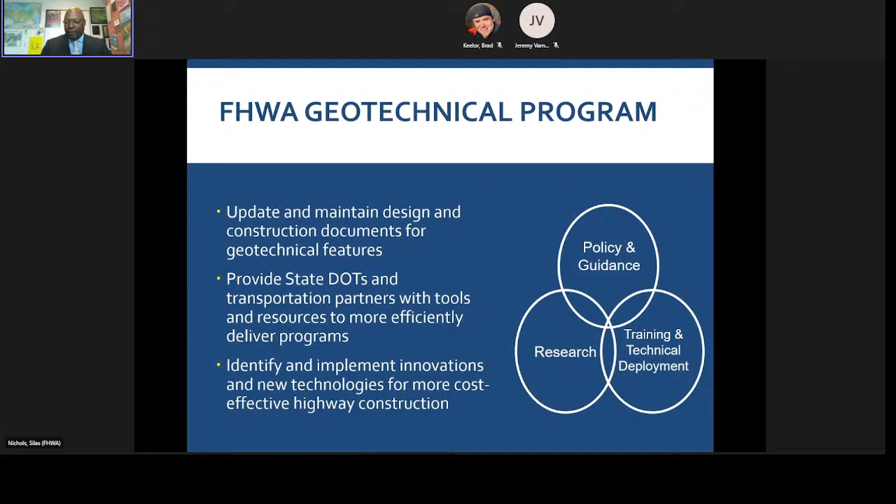Here, what we do is update, maintain, design and construction documents for geotechnical features. We provide tools and resources for more efficient delivery of programs at the state departments of transportation, and we look for ways to identify and implement innovations and new technologies for more cost-effective highway construction solutions.

At the moment, the technical focus areas we're dealing with are outlined here. There are 5 we're pouring funding into primarily: innovations in geotechnical design and construction methods, advanced site characterization, geotechnical asset and performance management, and then areas that are multidisciplinary but not necessarily primarily geotechnical—scour and pavement—areas where, because we are a Department of Transportation with bridges and roads, we feel it's really important for us to be involved.

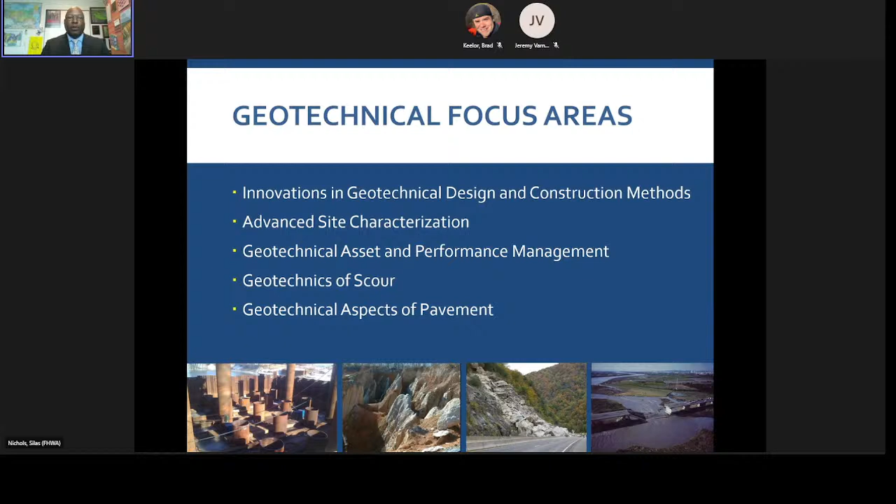But the one we're going to focus on today is the first one, the innovations in geotechnical design and construction methods. Our program objectives are pretty simple: we're trying to address a rapidly evolving geotechnical construction industry, through research and document or guidance development.

We're looking to address innovations in structure foundations, earth retention, and ground improvement that in the last 2 to 3 decades have been extraordinary and difficult for us to continue to write guidance around. Some of the areas we're actively working in are large diameter foundation elements, which is what I'm going to be talking about today.

Some of our barriers to increased use of shallow foundations in transportation applications, some of our contracting and procurement issues as we get more innovative contracting structures in place to deal with our more complex program and project delivery issues, some issues with acceptance criteria and equitability for geotechnical construction, and finally some of our ground modification issues and guidance. So really what I'm focused on today is just the first item, the large diameter foundation element issues.

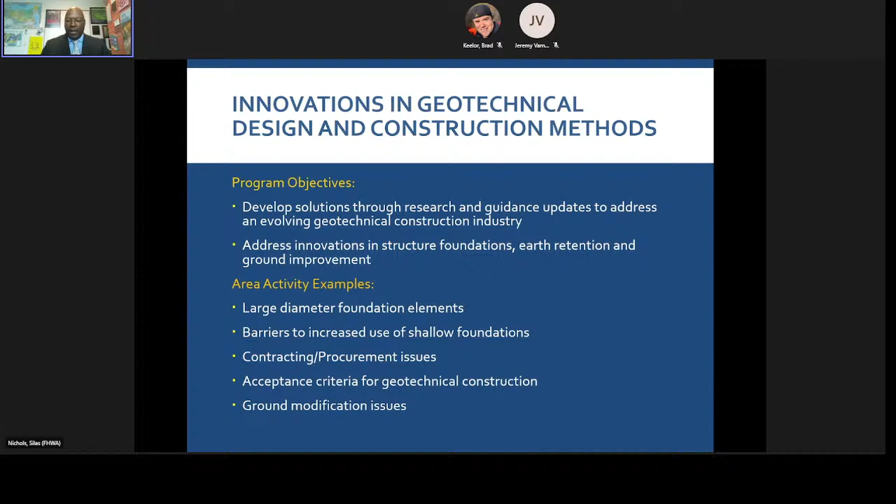I guess we could go back to the beginning and talk about what we do with a deep foundation element with respect to design. Traditionally, we've always thought about a nominal resistance or an ultimate resistance, however you want to determine it, as some combination of a side resistance and an end bearing. That's pretty standard. The thing that's not explicitly written on this slide but everybody's aware of is that you must move a foundation in order to mobilize any of that resistance.

And this really gets us to the root of the problem. As the elements get bigger in diameter and deeper, you have to move them much further in order to mobilize something we'd term a nominal resistance, and at some point that becomes impractical with respect to how we apply design.

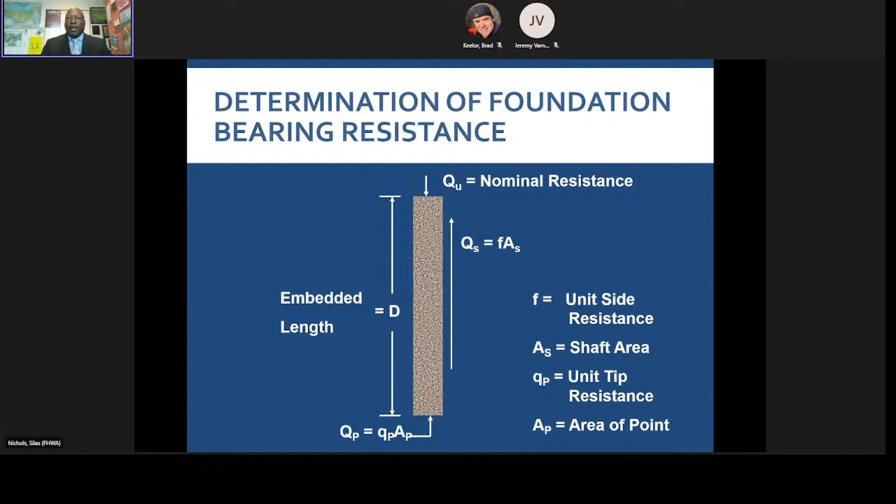This really is something that just comes out of the beginnings of the practice. We've developed all our design methodologies based on our analysis of load test databases, all kinds of different models including finite element and finite difference models, and our own experiences regionally around the country and around the world. But the issues we're starting to see are pretty extraordinary. The big picture issues for deep foundation elements are rooted in this idea that in probably the last 2 decades, the evolution in just how we construct foundations has been significant.

I'll get to why that might be the case here in just a second. But it's allowing us to have much greater load carrying capacity, much larger magnitudes of load. The demand per element is greatly increasing. Our materials and the demand on them is increasing. And as a result...

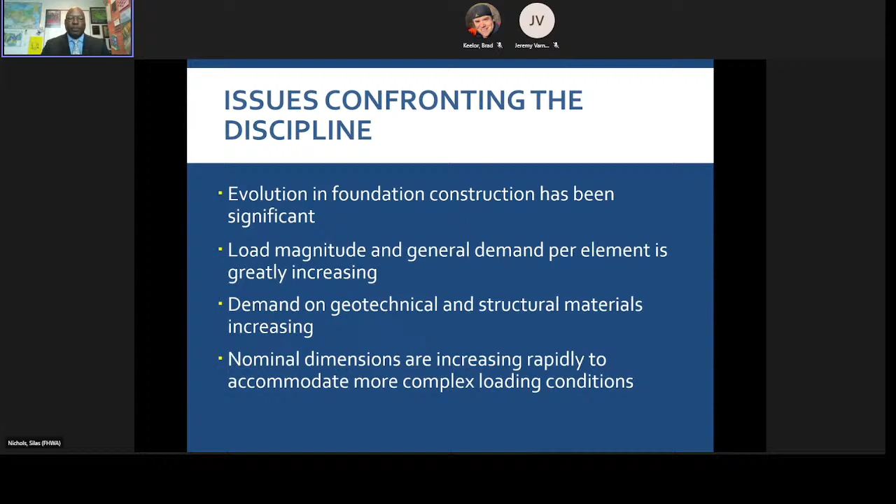The nominal dimensions of these elements are getting really big to accommodate really complex loading conditions. If you think about what has happened, speaking specifically to transportation, over the last few years, and really during our transition from working stress design to a limit states load and resistance factor design platform, some of the things that we're designing for now we really didn't pay much attention to in the past. Loading conditions like scour or vessel collision, seismic issues, kinematic loading conditions like lateral spread.

All of these are issues we really didn't design for in the past, but are now part of this more complex loading condition issue we have to deal with. So enter the emergence of large diameter foundation elements. This occurred in just a little over two decades, going from an average drilled shaft being no more than about 4 feet in diameter and no deeper than 100 feet, to things we're seeing today. There's an active project going on right now in the country with 12-foot diameter shafts proposed that are going to go down in excess of 220 feet. That is a different foundation design problem than the one we were used to seeing just 30 years ago.

It's not very different on the driven pile side. We were very used to very small diameter elements that we were driving into the ground, but now we're looking routinely at 6, 7, 8-foot diameter driven piles that we have to figure out how to not only control during construction, but determine what the load carrying capacity is going to be on them when we're done.

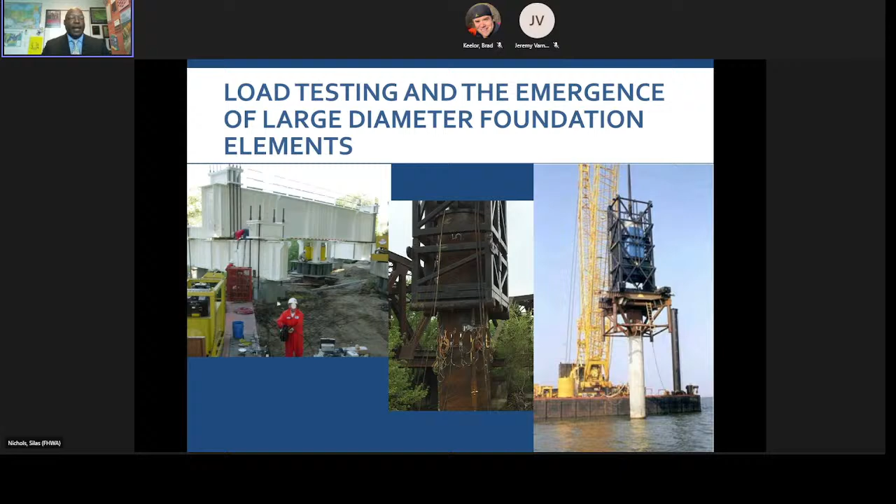The evolution here is partly due to advances in installation equipment. On the drilled shaft side, the development and implementation of rotators and oscillators. On the driven pile side, bigger and bigger and more capable hammers have allowed us the ability to build bigger elements. But really, this advance is mostly due to our advances in load testing, our ability to put bigger and bigger loads on things. This has allowed the industry to have much greater confidence in the design and construction of these elements, and hence our comfort with making them bigger and bigger.

To address some of this, the Federal Highway Administration and others have already begun a lot of work addressing this rapid evolution. I'm going to talk about a lot of this during this presentation, but documents we've finished in the last few years include our drilled shaft manual, GEC 10, our driven piles manual update, GEC 12, and we recently developed a document on lateral loading on deep foundations, GEC 9.

We've completed research on large diameter open-ended piles, that's open-ended piles of diameters 36 inches or greater. We've done some work on post-grouting of drilled shafts, and that has led into other work. The SHRP 2 program, the Strategic Highway Research Program, in its second incarnation, R19B project, was focused on calibration at the service limit state for load and resistance factor design.

We're looking at construction means and methods for large diameter foundation elements. NCHRP Project 24-51 is now in its beginning stages, active and working toward addressing that issue. There's also the optimization of load transfer in drilled shafts, which was follow-on work to the FHWA post-grouted work done for Caltrans.

Control of materials such as tremie concretes and high-strength steels - the Federal Highway Administration has done recently some work on tremie concrete, and we are actively getting ready to start more research on tremie concrete. Then finally, the acceptance requirements and procedures for large diameter foundation elements, or just foundation elements in general. We recently published GEC 15. It hasn't been formally announced yet, but it is available for download on the FHWA website. It is a document that looks at procedural information on how to properly go through everything you have to make an acceptance decision on a deep foundation element.

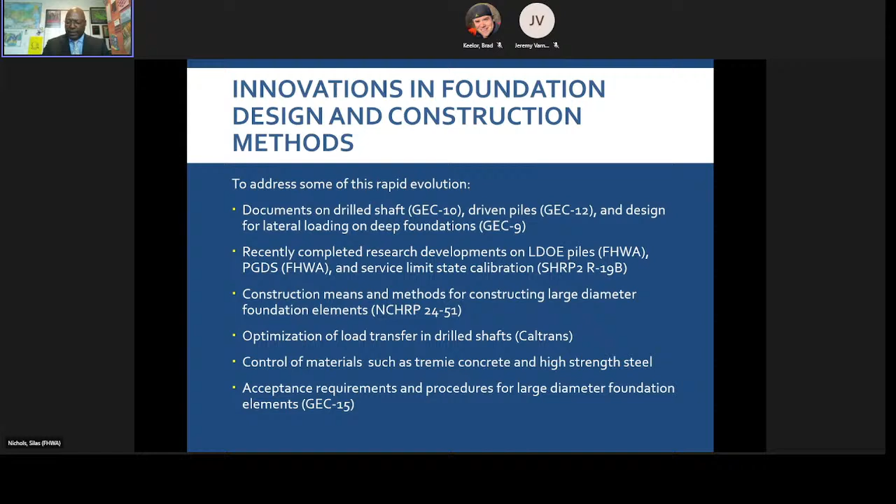I'm going to start with drilled shafts. Back in 2018, we published an update to our drilled shaft manual, GEC 10. I recognize it has not been easy to get your hands on because it hasn't been available for download. We're working on that now, and I expect within a few weeks we'll have it online and available for download.

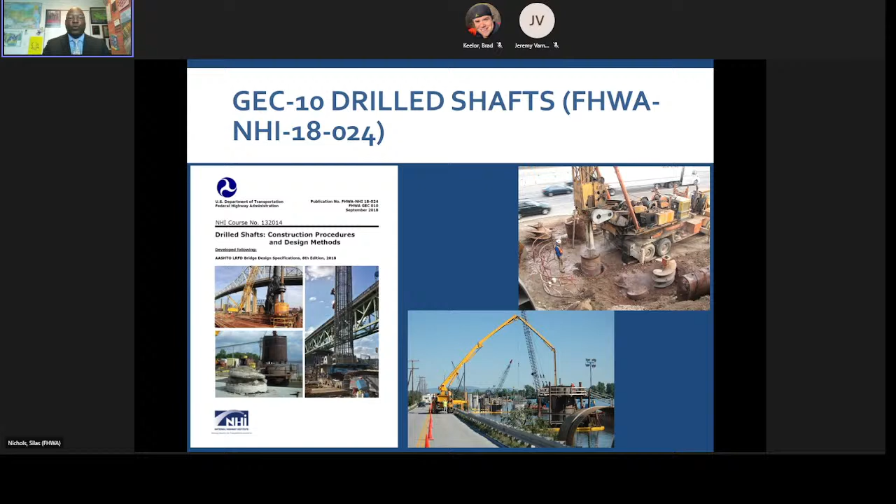The drill shaft manual was updated in 2018. It was a really short turnaround from the previous version because the evolution in this area has happened extremely rapidly and we haven't been able to capture everything we needed. As a result, we had to start a major update to this document five years after the previous version.

The things we were able to address included the shafts becoming much larger. Back in our 1999 version of this manual, it was designed with the idea that shafts were never going to be larger in diameter than about 4 feet, and wouldn't be deeper than about 100 feet. That's just not the case anymore. They're much deeper, we have new means and methods for installation, significantly longer concrete pours, which is its own headache, and much larger load carrying capacities.

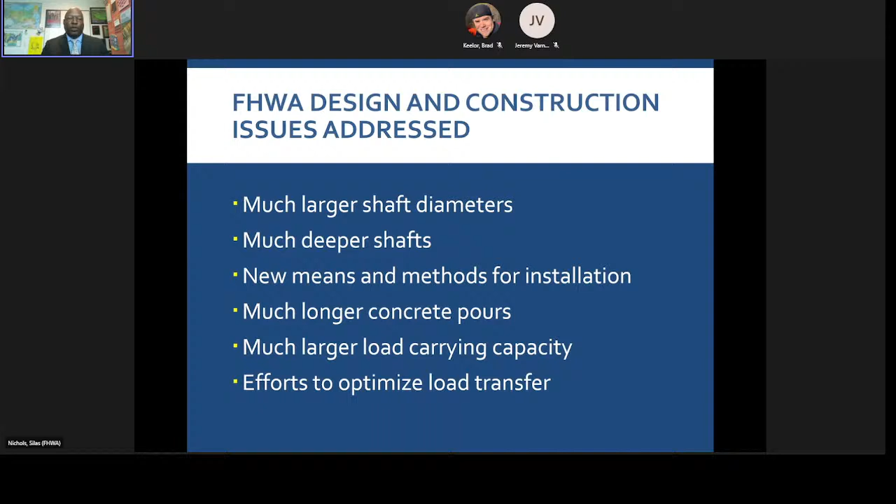And then we've got this idea of what to do with these load transfer curves - when you are picking up side resistance versus when you are picking up end resistance, and can we do something to optimize that in order to make the design process and performance of a drilled shaft more efficient? Along the way, within GEC 10, we were able to address some really low-hanging fruit.

One of those was the use of prototype shafts. Everybody is familiar with demonstration shafts or load test shafts done on projects, and for transportation we're no different. In our previous manual, we allowed for the use of prototype shafts on any load shaft project, with stipulations that are pretty common in the literature.

At least half the diameter of a production shaft on the project, a minimum of 30 inches if nothing else, constructed using similar tools and construction techniques, and then some information on what to do about exposure time and unit values for side and base resistance with respect to the diameter of the shaft you're actually looking at.

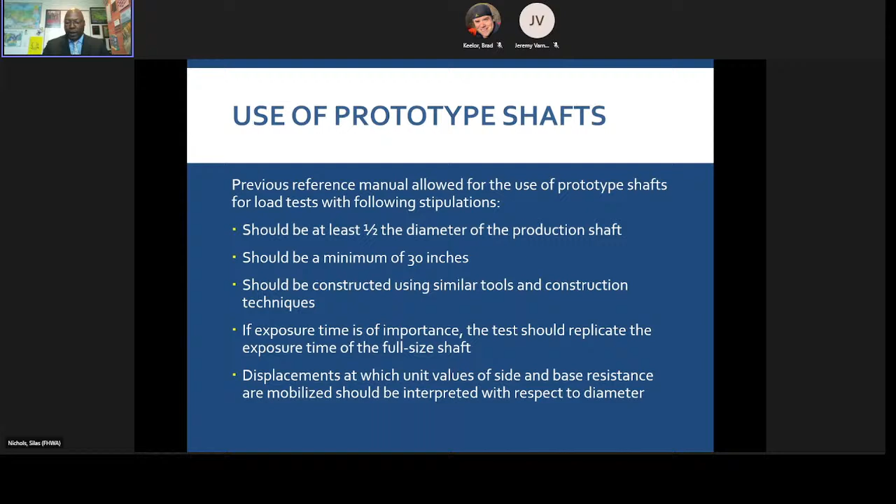The real big issue here was that as the elements got bigger and bigger, it was no longer a sure thing that you were going to be using similar tools and construction techniques on your prototype shaft as you would on your production shaft, which makes the element different. We thought we needed to address that relatively quickly.

The way we went about addressing that recently was to differentiate construction phase load tests from design phase load tests. The idea here is that in design phase, the main purpose of load tests is really to establish what unit side and base resistances are going to be available in the regional geology you're working in. So we've left the information on design phase load tests alone.

We still allow prototype tests under the previous information. Construction phase tests, we think, are a different animal because we need to be able to replicate construction means and methods and the time for the concrete pour. If you're interpreting the words correctly, what I'm basically saying is that the uncertainty in a larger diameter element is really on the ability to repeatedly construct that element over and over again, and not necessarily on how much load nominally the element can carry.

And this is important. So for construction phase tests, we now have written in that any load test done in construction phase after letting needs to be the same size as the largest production shaft on the project. Really, this is to assure that a contractor can repeatedly construct a shaft and deliver the project in accordance with the requirements to justify whatever higher resistance factor we're going to allow them to use as part of design.

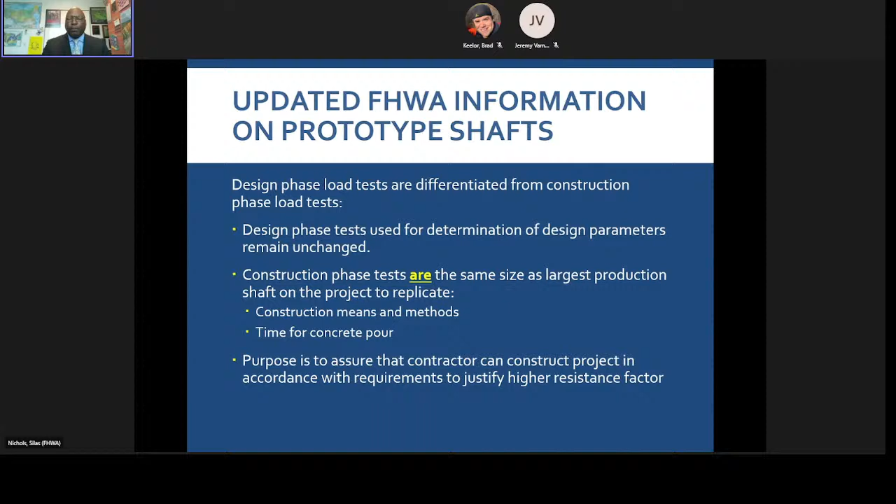The second piece of low-hanging fruit was about the interpretation of bidirectional load tests. So as the elements got bigger, the idea of top-down static load tests became impractical.

The development was the O-cell, but there are now a bunch of different versions of bidirectional load cells out there for bidirectional testing. What you're looking at here on the left, figure A, is just a typical bidirectional test result coming back in. Figure B on the right is the top-down construction from the bidirectional test. What we were really interested in here is making sure that the reports from load tests were accurately conveying what actually happened in the load test and what is available for load carrying capacity in the element.

The interpretation of a bidirectional load test is pretty standard. If you're looking at point 4 on figure A, that is the load corresponding to a deformation of 0.4 inches. We can take those two points, add them together, go over to figure B, and you get the constructed point in the top-down curve. That's fine, that's what we expect to see.

The problem comes when you get to side resistance, the top curve in figure A, out past 0.5, when the shaft has failed. In order to construct the remainder of that side resistance curve, you'd have to extrapolate it, which is what they've done here in figure A. Then correspondingly you get an extrapolated curve in figure B. Our issue is that this is not a measured load.

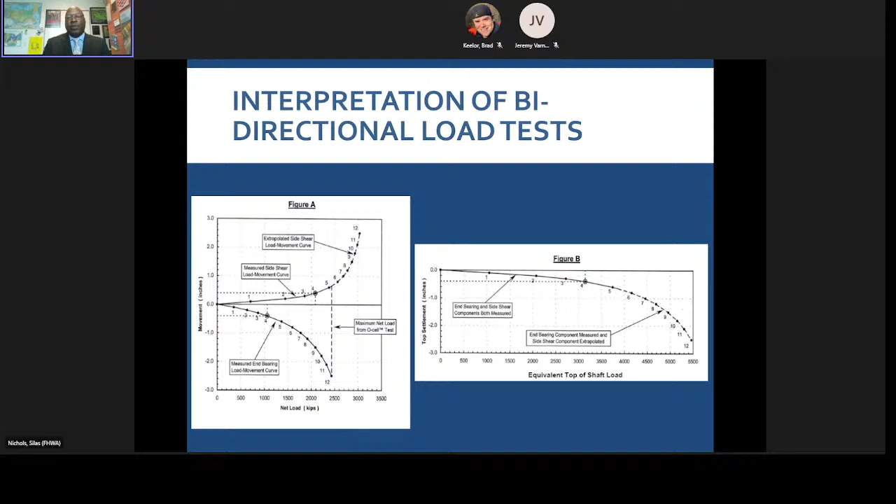Some additional issues we've been looking at: full depth steel. Previous versions of our document only suggested that steel be extended a minimum of 10 feet below where fixity is essentially provided in the shaft. This is a subjective determination. It also, because you don't have steel going all the way to the bottom, doesn't allow for acceptance testing in ways that are common for drilled shaft elements.

So we've adjusted the language there to require a minimum amount of steel for the full length of the shaft. We also felt like this was just a basic ease of construction issue versus having to hang a cage that's only partially the length of the shaft.

Regarding concrete pours, as they got longer and bigger, we were doing a lot of large diameter shafts, these deeper shafts in urban areas. The issue became, could you get concrete to the site in a manner that allowed you to continuously make the pour? We're still working on this item, but for current purposes we've rewritten this section to ask for a minimum amount of concrete to be on site prior to beginning a pour, so we have a better likelihood of actually getting to the end of a pour continuously.

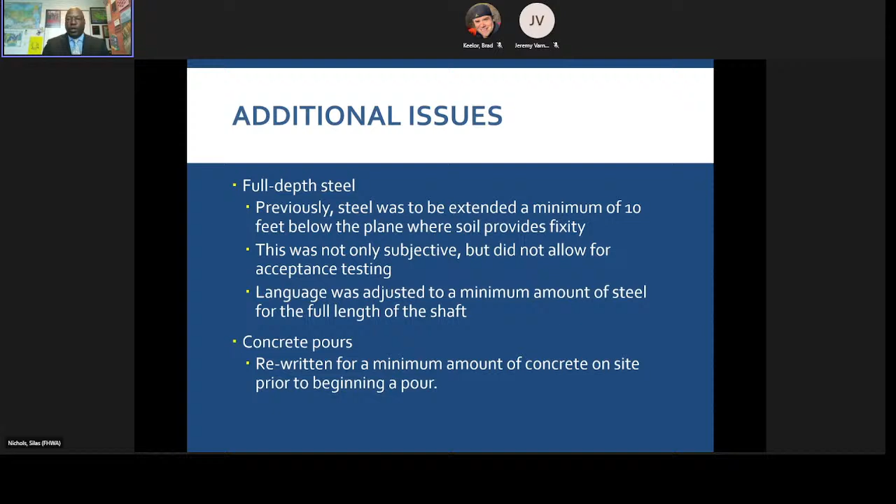Along the way we recognized we still had some gaps, so we've been conducting some research in-house. One piece of research completed a while back was on tremie concrete. The research was conducted by the University of Missouri, and we were looking to address issues specific to what we called mass pours and geotechnical applications.

We went through a significant literature review and placed a significant focus on understanding factors contributing to the performance of concrete, including primarily thermal issues and bleed and segregation issues. The effort focused on some numerical modeling and laboratory scale testing. We did not ever actually publish the report. That doesn't mean we didn't learn anything from it; it just means we don't believe we've asked the right questions yet in research. We're doing some more work on this, and I'll talk about it toward the end of this presentation, as we're in a large effort to address issues with tremie concrete or large pours under tremie conditions.

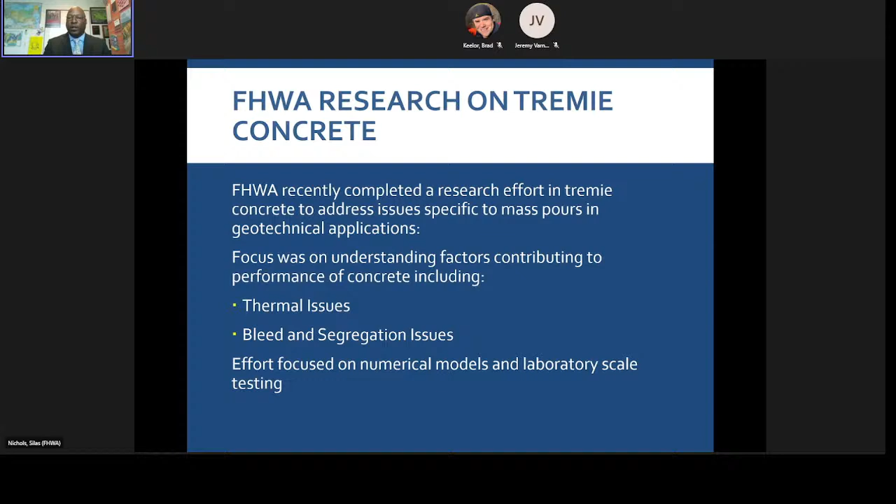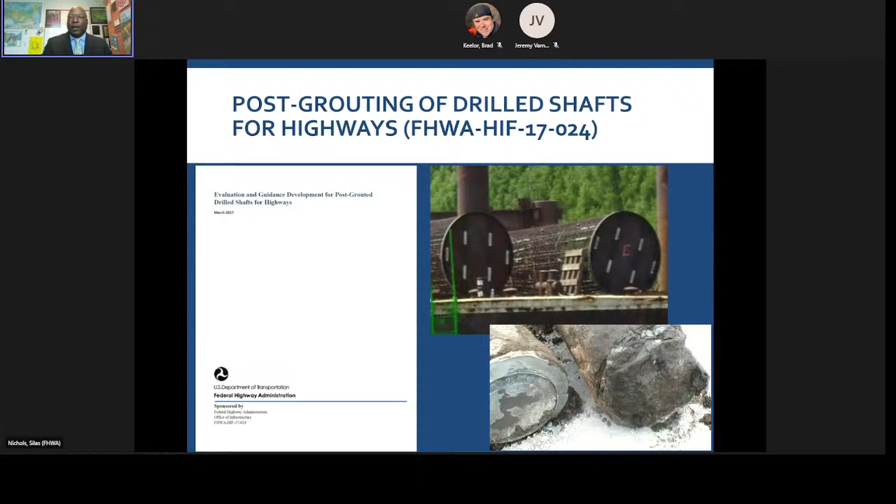The other piece of recent research we've completed was on post-grouting of drilled shafts. We published a report back in 2017 on this. It was completed principally by the International Association of Foundation Drilling, ADSC. They had a number of subs I won't name here, but they were the lead on this. What we were asking for were recommendations on how to bound the use of post-grouting for our current state of knowledge, how to quantify improvement mechanisms for post-grouting. We wanted the development of design methodologies for its appropriate use, and to look for some methods for verification.

This research came about, I think we initiated it at the end of 2012, because we were starting to see more and more value engineered projects around the country looking at the use of post-grouting, not necessarily for remediation of shafts, but to more efficiently design the shaft. We were being asked a lot about what to do about this. How can we bid it? How can we design it? Can we really use this? So we asked the research team to start investigating what's really going on when we post-grout a shaft.

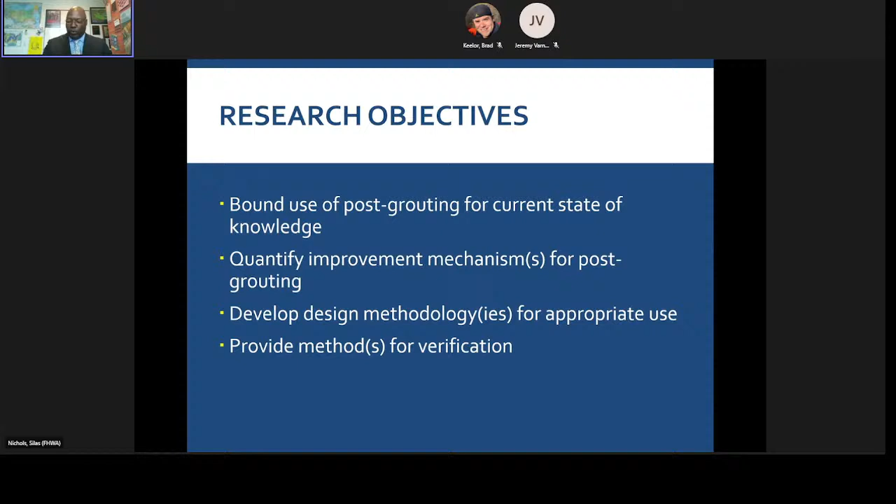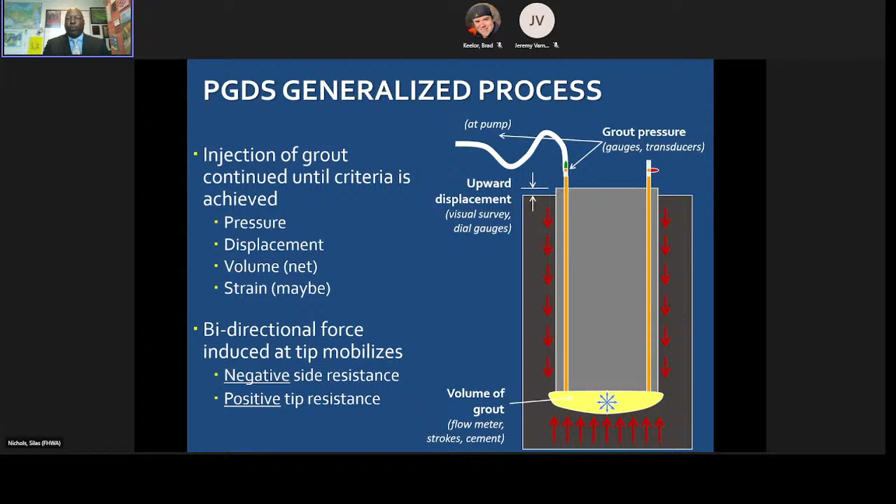For those unfamiliar with post-grouting, it's a pretty simple procedure. From an ungrouted shaft, we can install, or just have through the existing tubes that are in the shaft for non-destructive testing, the ability to blow out the bottoms of those, or set up a different system. We can grout at the tip of a shaft. By grouting at the tip, we can mobilize that tip, which results in a negative side resistance, or the shaft starts to move up in the ground, and a positive tip resistance as we engage end bearing. We can measure various criteria - pressure, displacement, volume, strain - until we meet a criteria that says we have effectively improved the tip resistance in a drilled shaft.

Once you're done post-grouting, you have for all intents and purposes preloaded or pre-mobilized the tip of the shaft. Then once you go back into standard axial loading, you get a result featuring positive side and positive tip resistance. But the most important thing is that you have engaged tip resistance much faster by just stiffening the response at the tip. That allows us to move the load transfer curve a little bit, and you now start to pick up tip resistance at the same time that you're picking up side resistance.

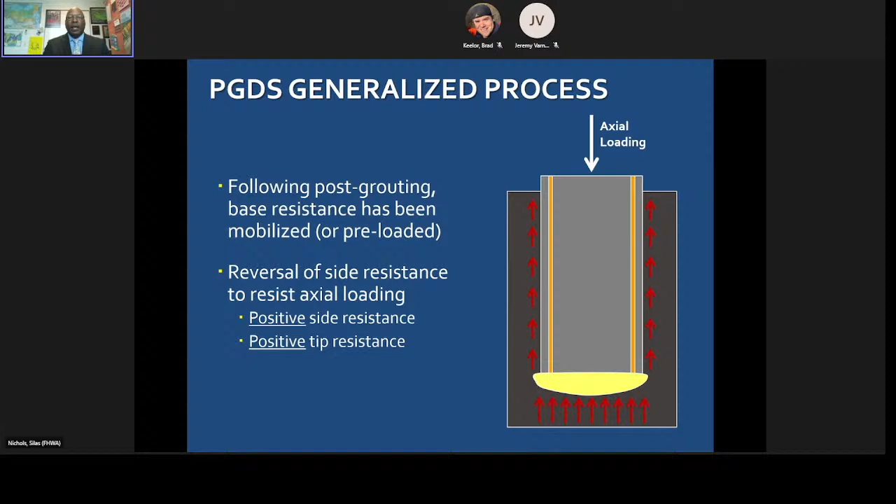This is extremely important. The research looked at three different devices, done by ADSC and the University of Missouri. Erik Loehr and Andy Boeckmann were really the principals doing the majority of the research work, and they looked at three different devices for loading the tip of a shaft.

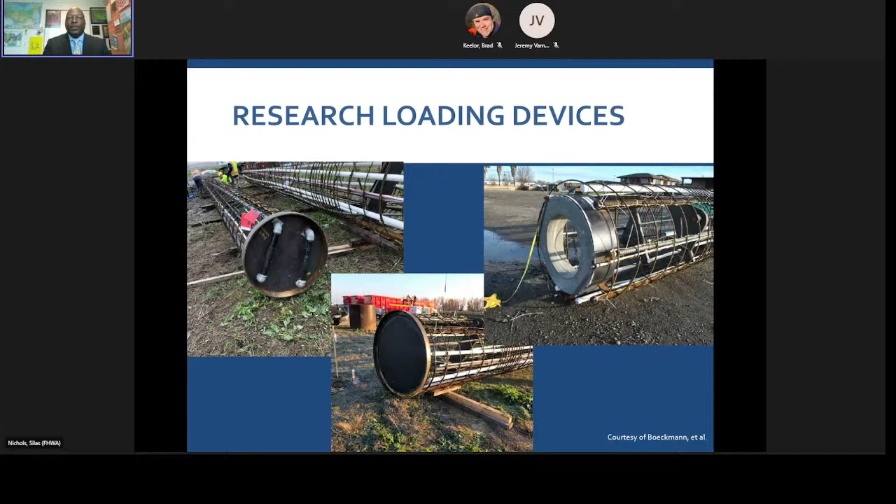The one on the upper left is the standard sleeve port - it's an open system. The middle one is the flat jack, an enclosed system that allows us to better control the volume of the grout. The one on the right is not a post-grouted system, but it is an O-cell - a hydraulic system for proof loading shafts. So those were the three systems that were looked at.

The significant finding here is that we were able to identify a predominant mechanism for improved performance at the tip, and that was pre-mobilization of the tip of the drilled shaft. Now, some other things happen, as would be expected, especially with the sleeve port system. You can get some ground improvement as the grout sort of escapes into the soil matrix, which would contribute to an improved performance in the shaft.

You can even get some run-up along the sides of the shaft. Generally, this is associated with a loss of control of grouting. In both of those cases, could you use them? Yeah, but they're really, really difficult to bound the limits of and to figure out what you're really getting from it - a much more complex effort. So really the big issue here was this idea of mobilizing the tip of the shaft.

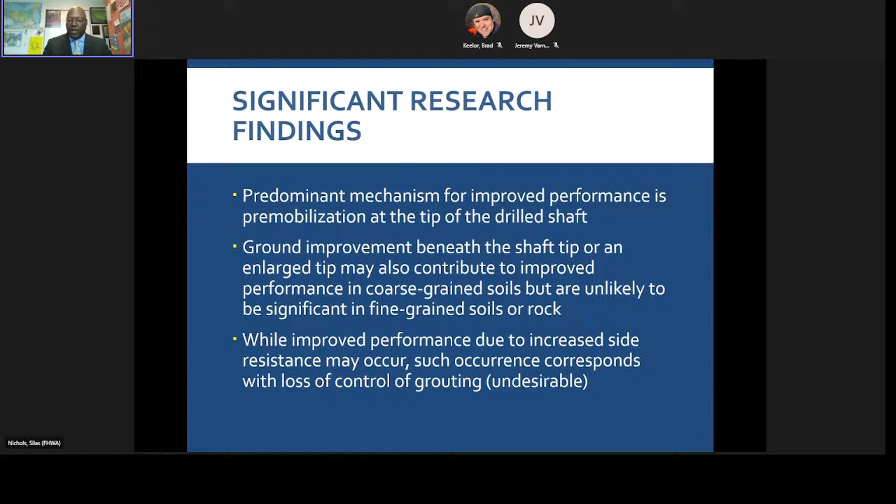Now, it should be pointed out that ultimately you don't change the capacity of the shaft - the combined ultimate resistance of the shaft. They will eventually converge where they're supposed to converge. But all we're really doing is changing the rate at which tip resistance is acquired by stiffening the response at the toe and moving that load transfer curve over a little bit, which is a big deal if we're thinking about how efficiently we can design shafts in the future.

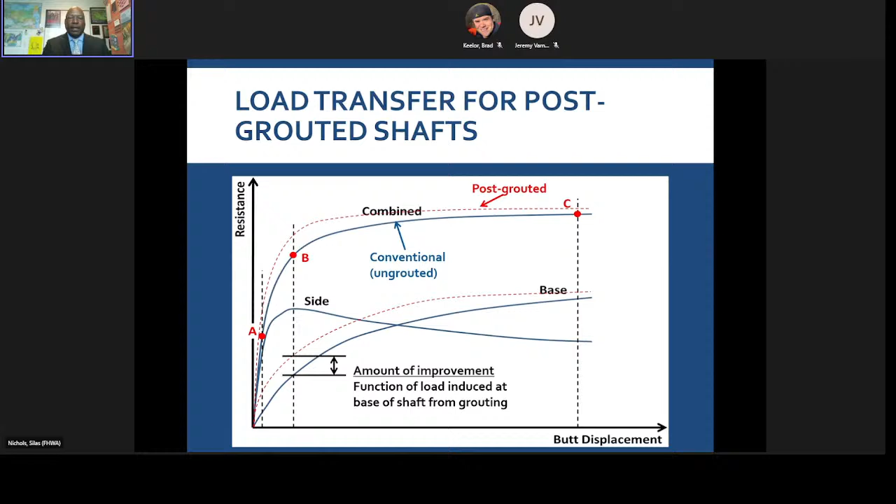And so we're headed down a number of pathways with this. The acceptance issue is probably the biggest one. We need some metrics for verifying that improvements are occurring, and we need them to be rational.

It should make sense that if you've got an ungrouted shaft in the ground, you've had to go through a lot of work to actually accept that shaft. Going in and grouting the tip of it is, under every circumstance, improving the shaft. How do you verify that without making it an undue burden on the contractor or the state for assuring that improvement occurred?

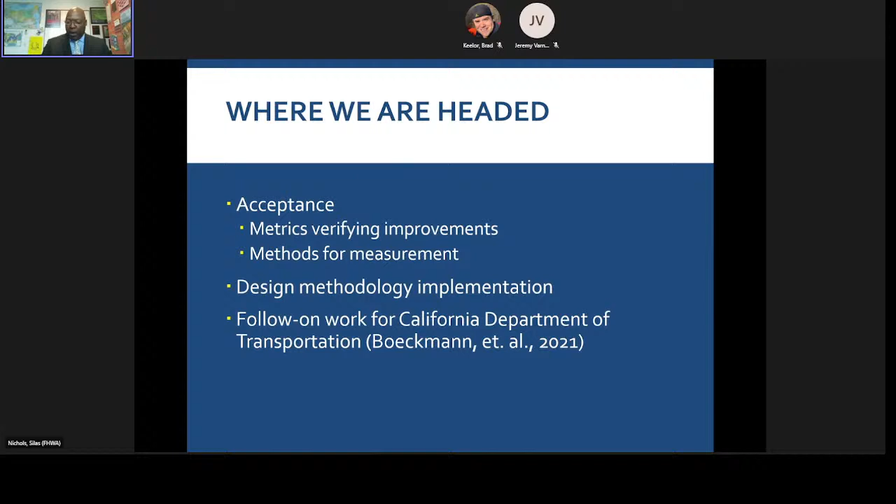And then methods for measurement of that. We were looking at a design methodology and the implementation of that, and that led to some add-on work for the California Department of Transportation, Caltrans, that was done by the University of Missouri, again, led by Andy Boeckmann, who was a PhD student there at the time.

And so the work for Caltrans, and we paid very close attention to this, really looked at two fundamental considerations for implementation of a design procedure that considered post-grouting. It was establishing a level of uncertainty that was specific to the loading device that you were using to create this bidirectional load at the tip of the shaft. That would be the way that you could appropriately select a resistance factor that essentially looked at the way you were mobilizing the tip and what the uncertainties were in that methodology.

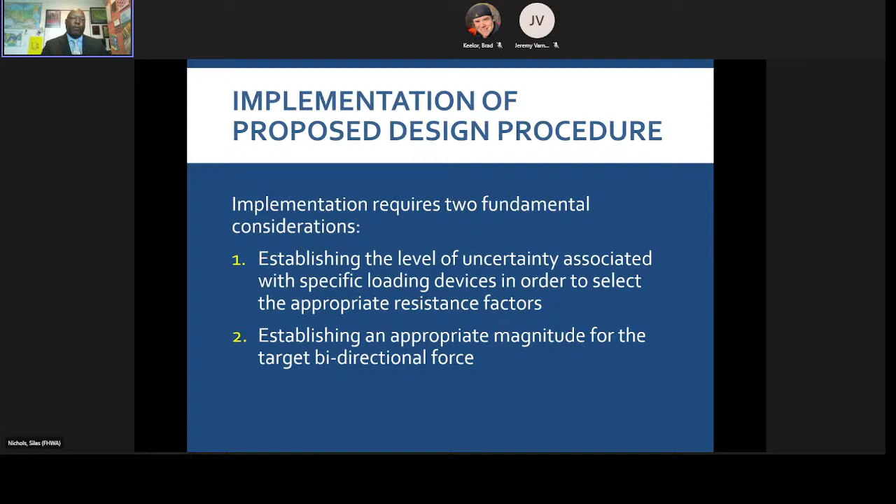And then the second consideration that had to be addressed was establishing an appropriate magnitude for what that bidirectional force needed to be. So you need to proof load it enough, but what should that target be and how do we determine what it is?

And so that research, I'm going to throw some stuff up here that really is in its infancy. You should not take any of this as anything that the Federal Highway Administration is publishing. But what you're looking at here is...

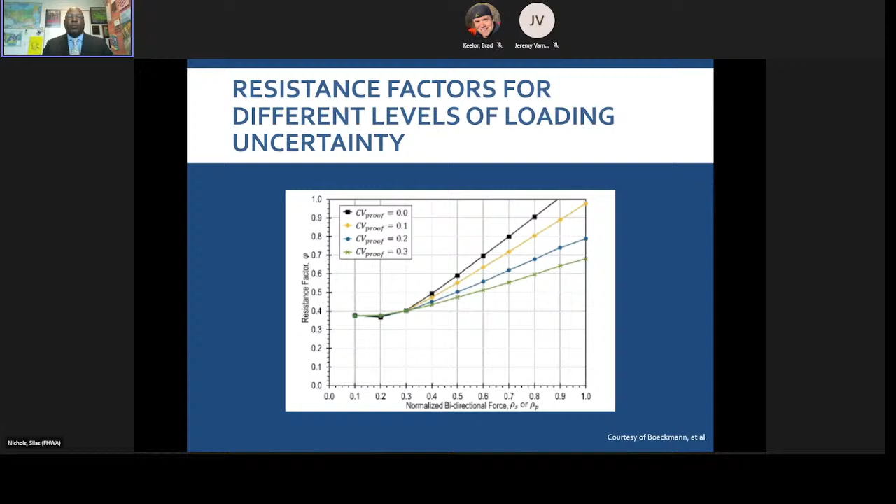And so from here, the research team was able to start to look at ways of proposing levels of uncertainty for different ways of mobilizing this tip resistance or applying a bidirectional force at the base of a shaft.

And then a rim cell, which is a hydraulic device, which would be even more reliable or less uncertain. And if you were going to add bidirectional devices into this, they would be at least as good as a rim cell or better. I don't know if I should be using a word like good, but that's fine.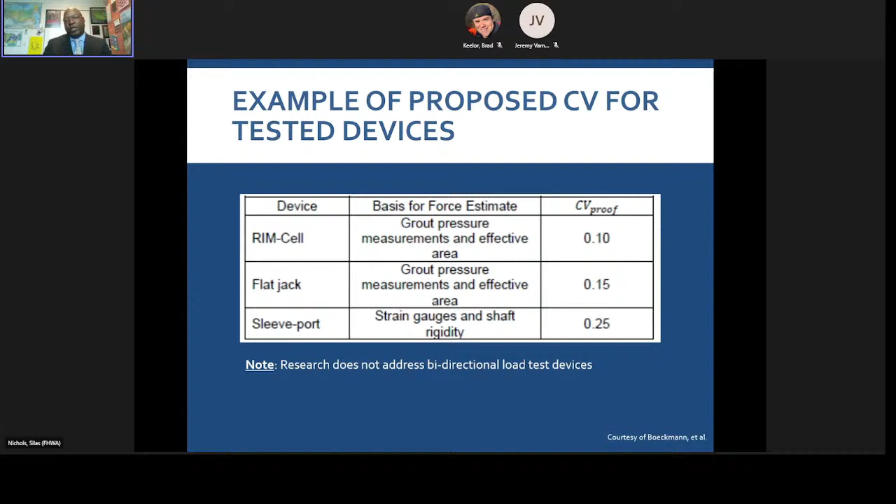Once you've gotten to how you're going to actually apply the bidirectional force, you can start to apply an uncertainty to that method that allows you to look at an increased resistance factor associated with your ability to, for lack of a better term, proof load the shaft by stiffening the resistance at the toe.

Now you're probably thinking, does this mean the Federal Highway Administration is telling us that we're moving toward testing every shaft? I don't know if that's true yet, but for large diameter shafts it would make sense. The idea of more testing is not foreign—we do this with other deep foundation elements. I think it provides a much more rational and probably more cost-effective approach to design and construction of drilled shaft foundations, especially large diameter ones, and a much higher level of comfort with their long-term performance and reliability. That's essentially where we're heading with the research in drilled shafts.

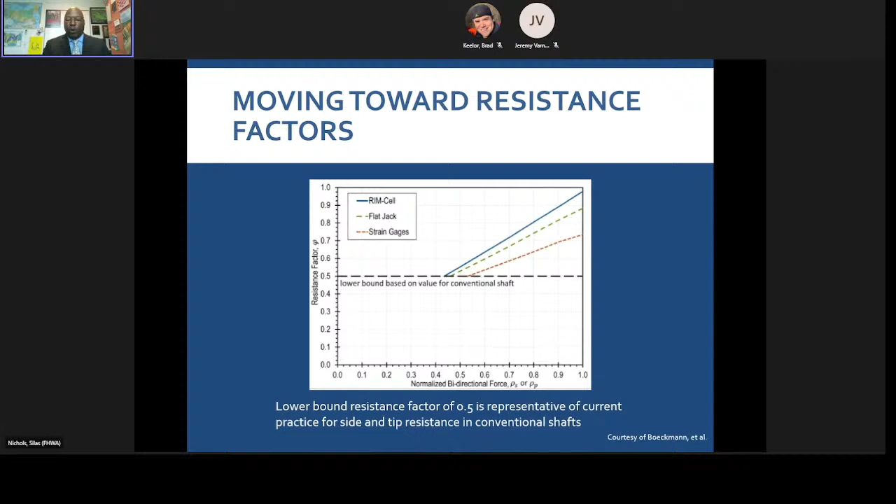And so what about driven piles? That's the other problem we have right now as the elements get bigger and bigger. Back in 2016, we published our update to the driven piles manual. Driven piles have been a staple—it's our most popular foundation element. It's been pretty easy to do these updates to just handle the advances in technology that have come along.

But we did still have a gap with driven piles when we finished this document—we didn't really have a way to address large diameter open-ended pipe piles, both concrete and steel. That was where the big evolution was coming in. We're now also seeing really large H-pile sections, which are a different problem. But we needed to start looking for a way to address these larger diameter elements, how they behaved, and what kinds of things we could do with them in the future with respect to design, construction, and acceptance.

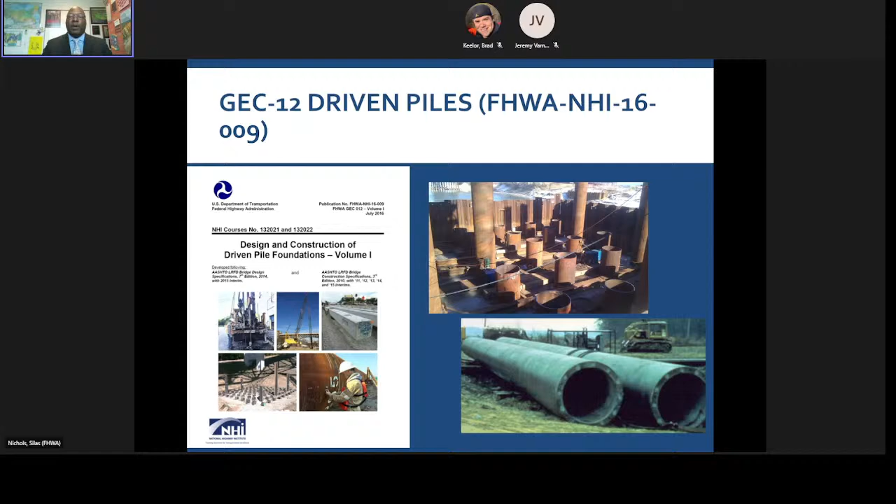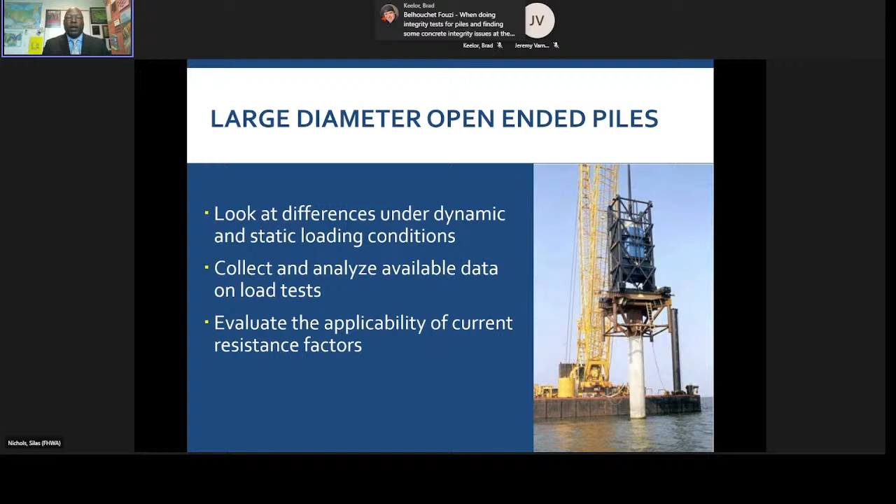And so we needed to look at some differences under both dynamic and static loading conditions. We wanted to collect and analyze whatever available load test data we could get our hands on, and then evaluate the applicability of our current resistance factors and design methodologies to these large diameter elements.

Back in 2020, we published a research report that is downloadable. This was led by principals Kathryn Petek and Bob Mitchell from Shannon and Wilson, with Mike McVay from the University of Florida, and a host of others. We asked them to take a look at those questions, and the way they approached this was to essentially establish what we knew we didn't know—what our known uncertainties were in the system.

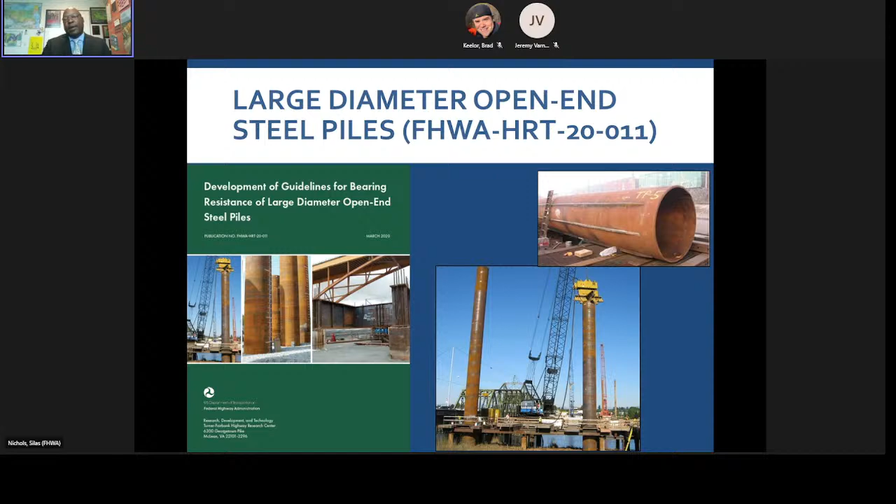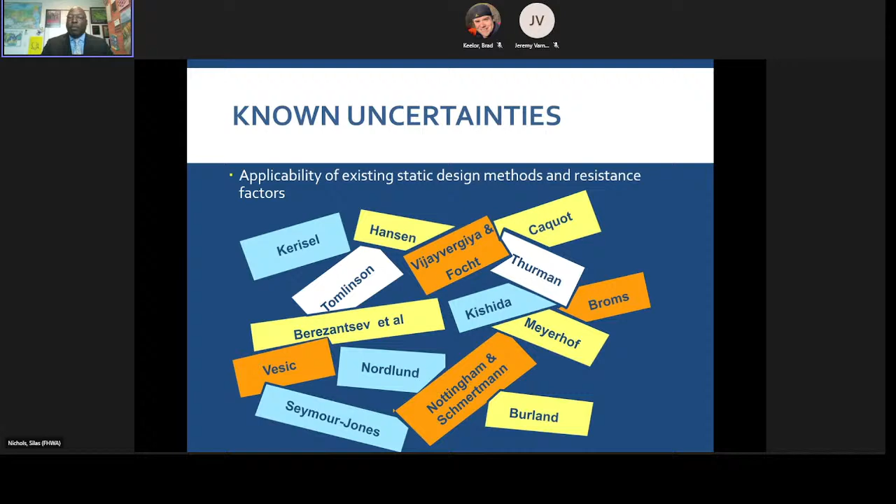So it started with just the basics. This actually comes from a training course we developed probably 20 years ago that, at the time, was conscious of the fact that we had a number of different ways of doing a static analysis design for a driven pile. We had a bunch of these methods out there, and we had to figure out which ones worked best for us. Of course, we settled on a couple, and they've been our basics for pretty much as long as we can remember. So we went forward with the known uncertainty of having a number of different existing static design methods.

We also had the known uncertainty of plugged and unplugged conditions. For small diameter elements, it's a little easier to deal with—we're pretty confident we can achieve a plugged condition in most soil conditions, and under those circumstances we'd get something that drives down with a base resistance tied to a plug acting as a closed-in element. But as the pile gets bigger and bigger, it starts to cut through the soil, and it's unclear whether or not it is plugging or when it plugs. If it isn't plugging, the base resistance looks a lot different during driving, so construction control becomes a problem. Once it stops and sets up, what are we really getting? If we have to restrike a large diameter pile, can we actually get enough?

Can we get enough out of the hammer to mobilize it to tell us what it is we're seeing?

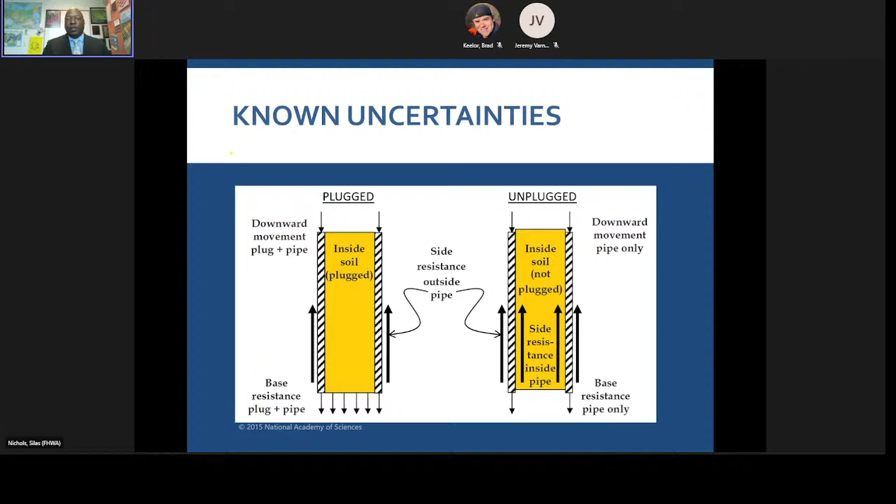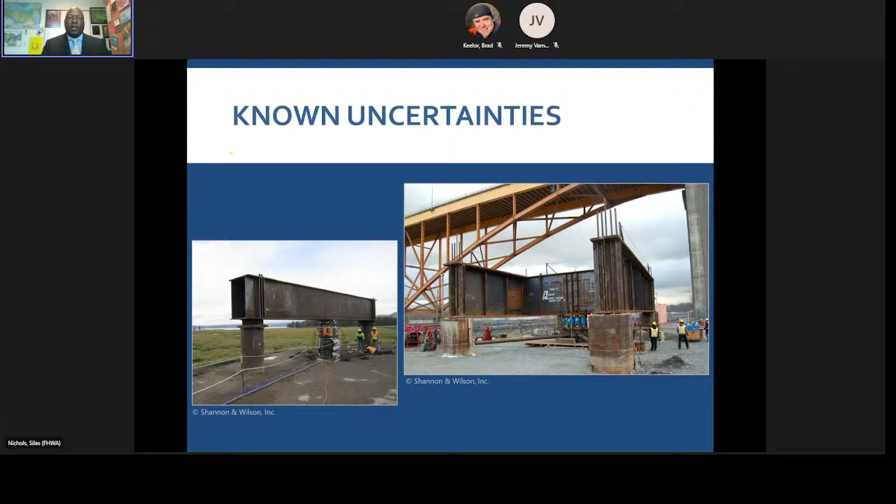So these are all known uncertainties about driven piles that we felt we had to deal with in research. Load testing, static load testing - it's really, really expensive, and it's really hard to get a bidirectional device to the bottom of a driven element. It's not routine for us to do a lot of large diameter static load tests, especially to failure.

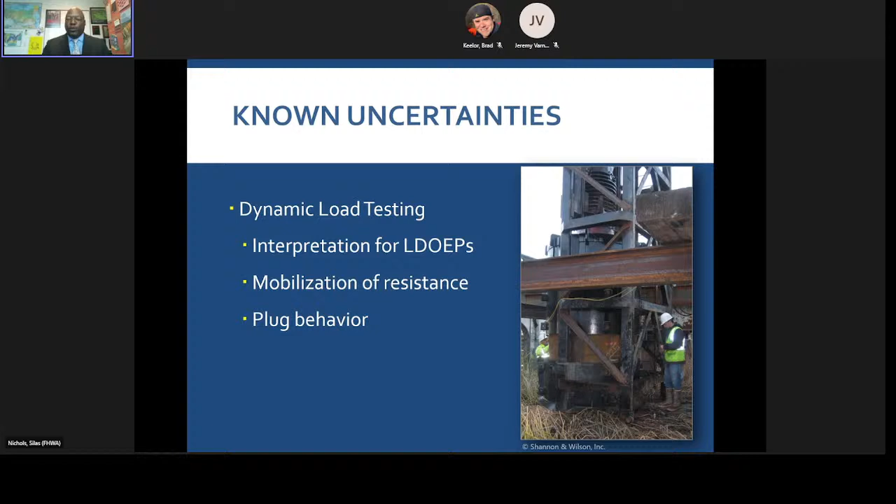And then dynamic load testing - I think everybody's aware of this one. We are now a much more reliant discipline on dynamic load testing for driven piles, but the interpretation of large diameter open-ended elements is much more difficult than smaller elements. Again, this mobilization of resistance, especially during restrike, and then what the plug behavior is and how that plug behavior is represented during construction control.

And so these were the known uncertainties we were trying to address. Shannon and Wilson and University of Florida went back and dug up one of our old FHWA load test databases. We asked them to reconfigure it. They did, they put a better face on it, and then reconstructed all of the data.

They then added a whole bunch of data on large diameter open-ended pipe piles - 113 steel, 42 concrete. That database is available; you can actually go in and download it. If you just Google FHWA and load test, deep foundation load test database, it will take you right to it at our Turner Fairbank Research Center. It is a static database at the moment - you can't add or modify it, but you can access the more than 1,500 piles that are in there.

From here, I think the most notable thing that jumps off the screen at you is that for the large diameter open-ended piles, there wasn't as much data as I think we thought we were going to come up with, especially on the concrete cylinders. Just not a lot of data.

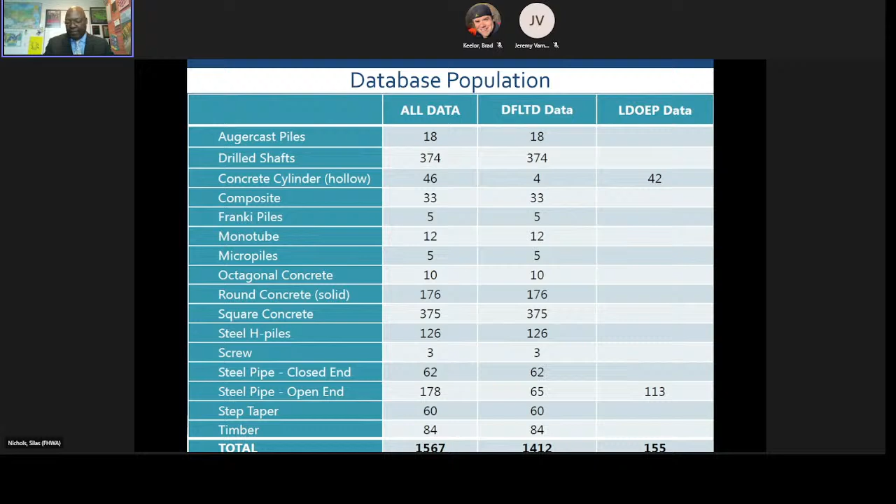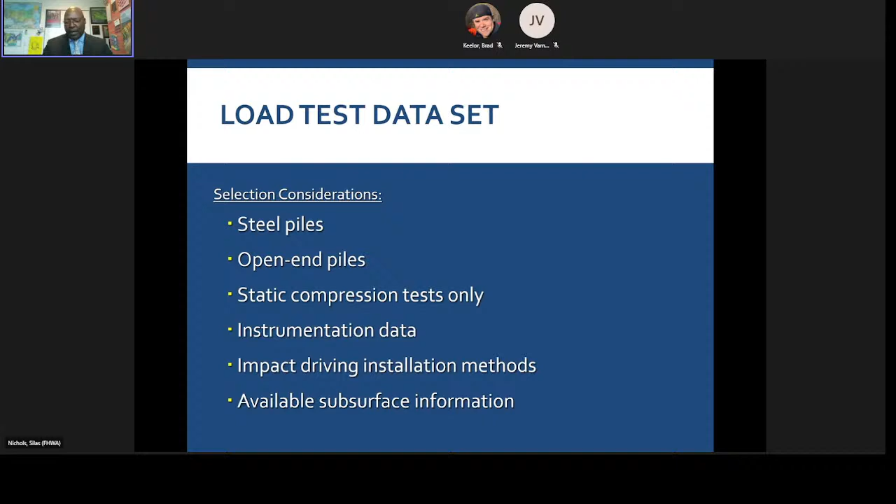When we got into the research, several meetings got us into a position where the selection considerations for how we would analyze the database focused only on steel piles, only open-ended piles, only those loaded in static compression. They had to have instrumentation, only impact driving methods, and you had to have available subsurface information. That seems pretty simple, but quite honestly, that was not as easy as you might think. We have a lot of incomplete load test data out there that is difficult to use.

So we ended up with a considerably smaller data set than I think I anticipated. We grouped the load test data sets by site condition - cohesive, cohesionless, and mixed. In order to get to some uniform section, you had to have 70% or greater of either cohesive or cohesionless material along the pile length. It turned out that with the three groupings, we really didn't statistically have enough data.

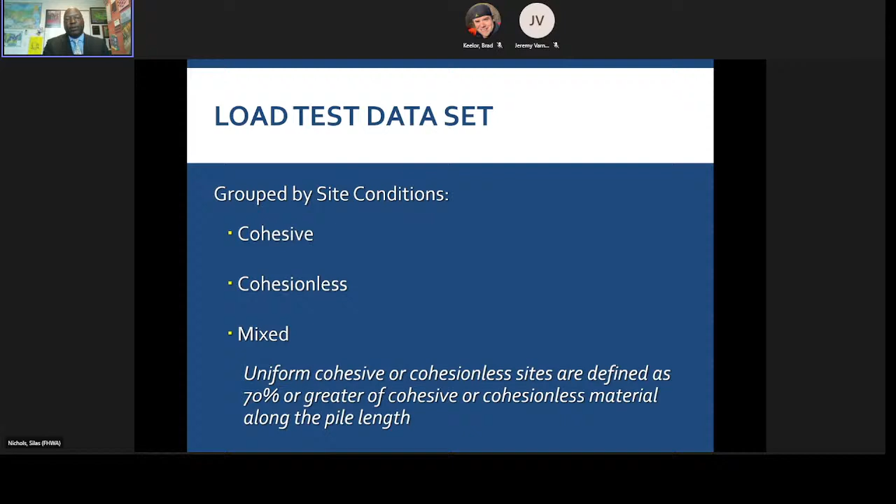Shannon and Wilson and the University of Florida went in, played around a little bit, and were able to create two more intermediate groups based on differences in the materials, both in bearing and inside resistance, giving us a total of 5 data sets. From there, here were the parametrics they looked at.

They went in and dug out 48 different static design methods to look at. That seemed like a lot to me - I don't think it was everything. They looked at AASHTO methods, DOT methods, offshore methods. They had some methods in there specifically developed for CPT data or to account for pile plugging.

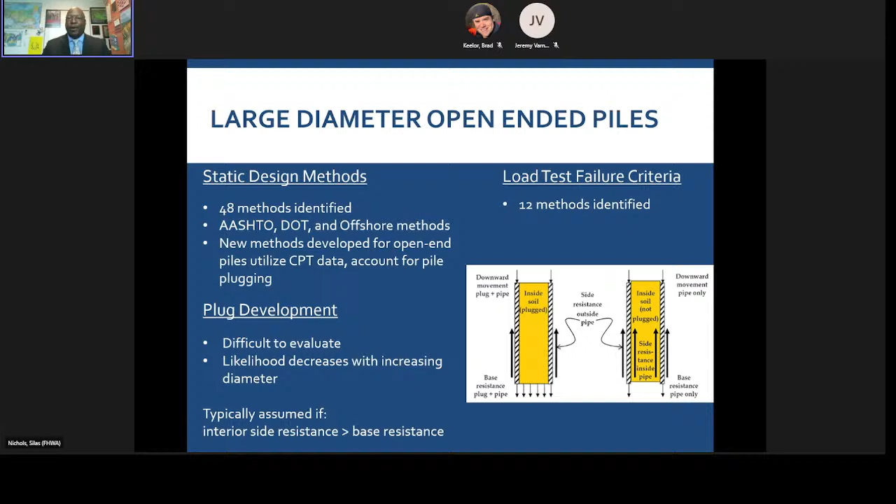They looked at plug development, which turned out to be much more difficult to evaluate than even we were expecting, despite the fact that we knew it was going to be difficult. And then the one that jumped off the page to me - they looked at load test failure criteria, 12 different methods. If I gave you a load deformation curve, I could put 12 different methods on it, depending on what was going on, to try and determine what failure would be defined as for that pile, which is its own problem. We're going to be addressing that in some current research we just let just 2 weeks ago.

So we went into resistance factor calibration. Here were the parametrics for that calibration exercise: the 5 data groups. They ended up taking the 12 failure criteria and got that down to 3 they thought were the most reliable. 12 different design methodologies - 4 in base, 4 in side, 4 that were combined - 2 target reliability indices, 3 resistance factor methods, and then 2 data versions.

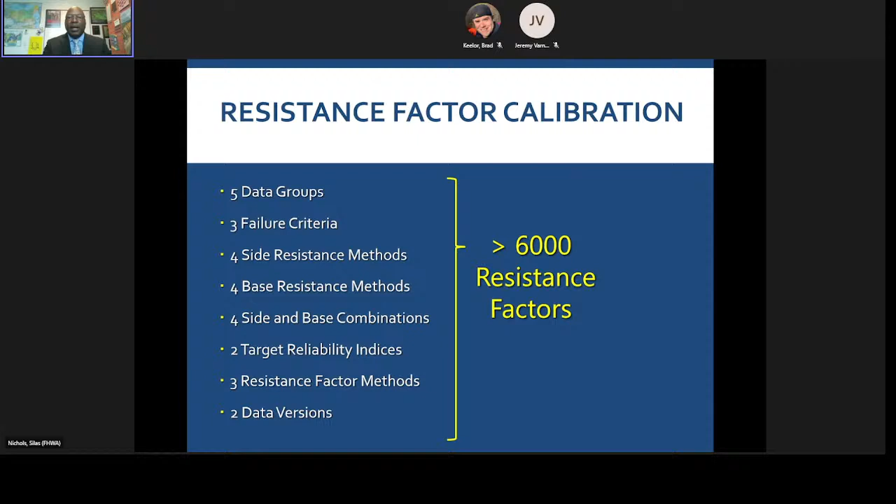When everything was said and done, the draft report produced for Federal Highways listed more than 6,000 resistance factors for these combinations. At one point they had sent over a series of tables that looked like this, with the method for the failure criterion along the x-axis, considerations down the y-axis, and combinations in the tables.

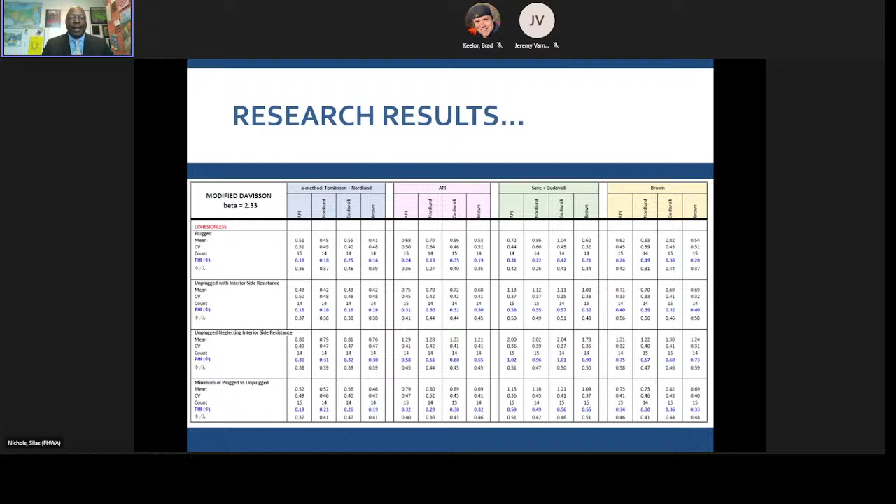These went on for days and days, and we got to the end of the exercise. The recommendations from Shannon and Wilson included revisions to existing static design methods, a couple of additional methods, explicit recommendations for plugged and unplugged conditions, specific resistance factors recommended to Federal Highways, and a recommendation for the load test failure criteria.

We're not really close to solving the bigger picture problems that were brought out by this research. There are things that are inherent relics of the geotechnical design discipline that are simply being blown up by the fact that the elements are getting bigger and bigger and deeper and deeper.

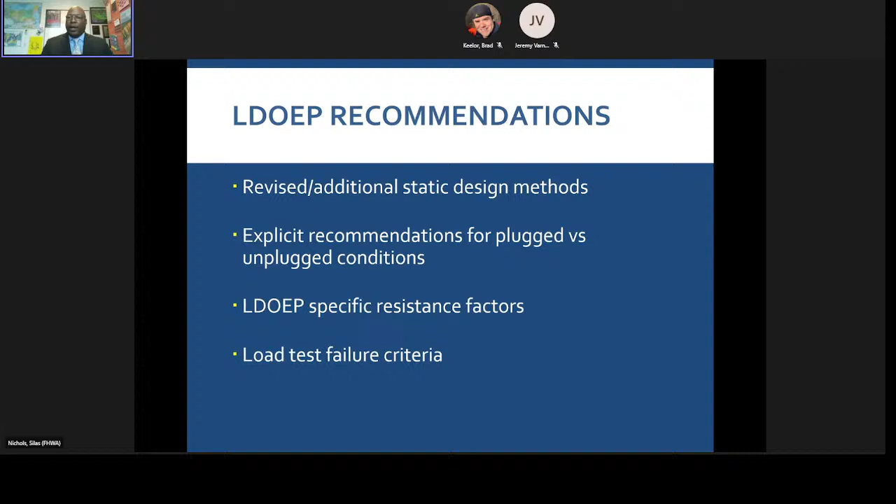We recognize we'd have to make adjustments regarding wave equation analysis and whether it's applicable to large diameter piles. We'd have to look at driving formulas like Engineering News and whether they're applicable for large diameter piles. Then there are recommendations for the static analysis methods preferred for large diameter piles in clay, sand, and mixed soils.

So that's where we are right now, and that's the logical evolution of the research we published just a couple of years ago. Like I said, there's still more work to do.

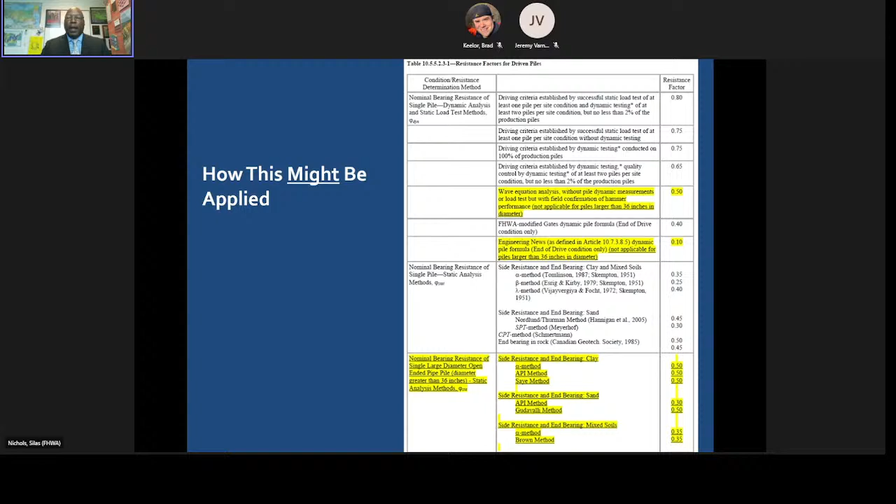Where we're headed is we've got to start looking at acceptance procedures and the determination of a failure criterion. It's unacceptable, I think, that we have all these different methods for determining what we think failure is in a large diameter element. It makes the idea of calibration for resistance factors something that isn't a rational process, and we've got to do something about that in limit states design.

There's also a need for additional data—a lot of data. It's our biggest problem, our lack of data. We need more data on concrete piles. We need data on piles with constrictor plates—we weren't even able to look at those.

The dynamic testing method work is its own problem. We've got to find a way to not only get more data there, but figure out how to get a consistent interpretation of what the dynamic testing data is telling us. So that would be the issues for the driven piles.

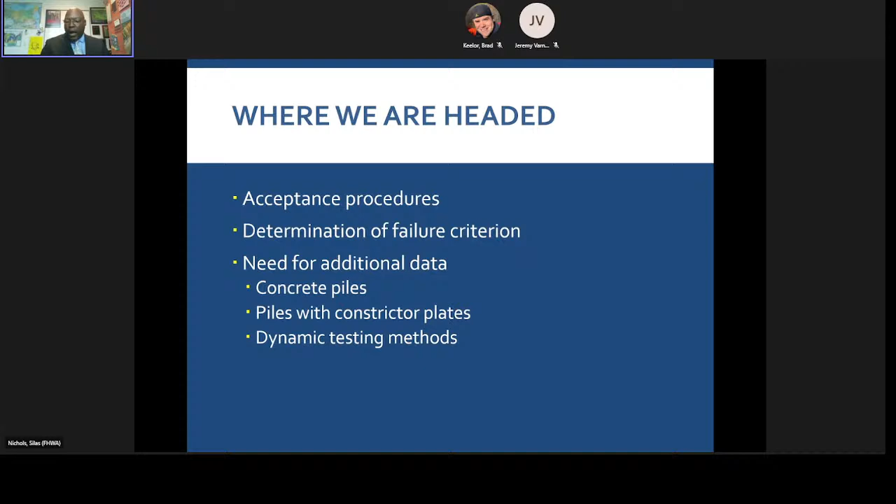I'm going to put one more slide up, and this will be the last slide of the presentation. This is focused on our outstanding issues for large diameter elements in general and where we're headed. The big one right now is this reevaluation of geotechnical limit states.

FHWA let a contract about a month ago—we just kicked it off the week before last. This one will be led by Dan Brown and Associates, with the University of Missouri as the principal investigator. There's a cast of thousands working on this from all over the country and around the world.

We're going to be looking at the applicability of LRFD to structural foundations—specific to bridges—and whether we need to do different things regarding the definition of the strength limit state, and geotechnical limit states in general. We're also letting a second effort, which should probably be announced as let in the next two weeks, on tremie concretes.

I think we asked the wrong questions the last time around. So this time around, we have redefined the parameters of the research to help us better understand what we think are measurable metrics, or what needs to be measured within a tremie concrete during construction and during control of construction, that would allow us to more accurately understand what its long-term performance is going to be.

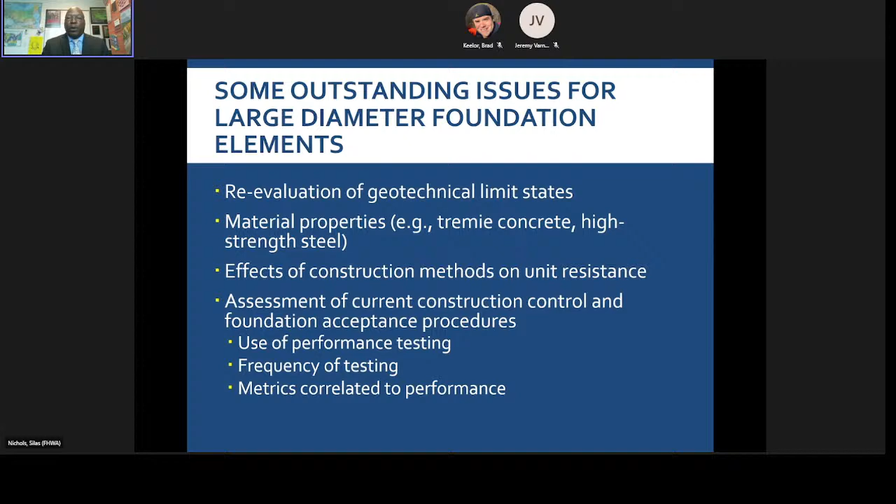And so with that, I will say thank you, and I will turn it back over.